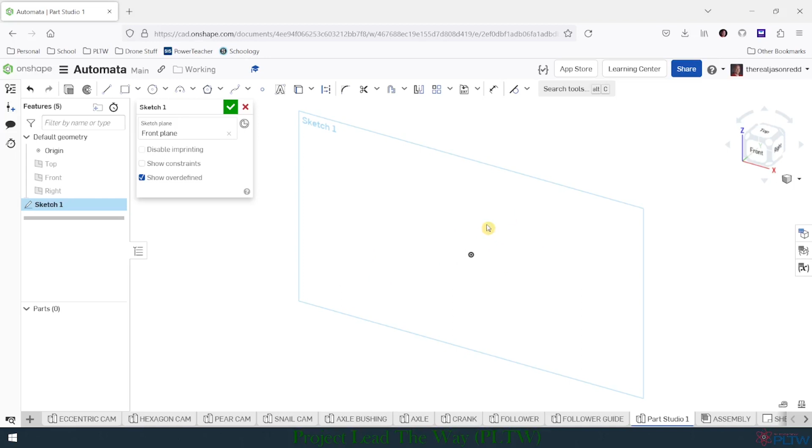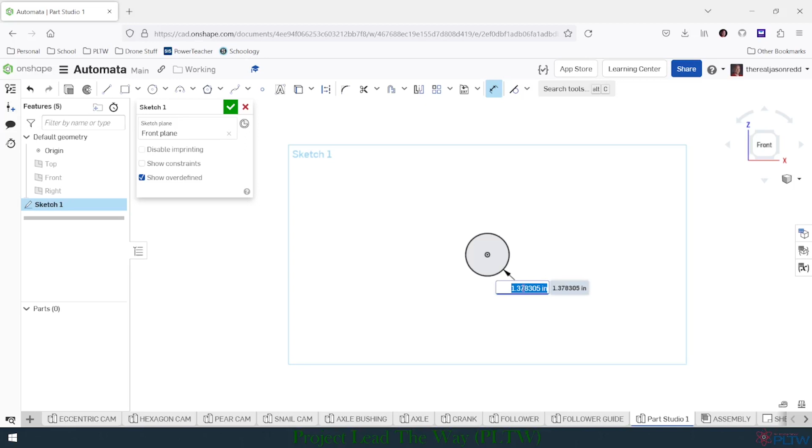Next, click on Front on the view cube and zoom out a little bit. Go to Circle, start this circle at the origin, and place it here. We'll use the dimension tool to dimension this circle so that it has a diameter, and since we're given the radius, we need to type in 0.3125 times 2.

Next, we'll leave the origin on. We'll go to Line and draw a line that goes through this circle, but just above the center point of this circle.

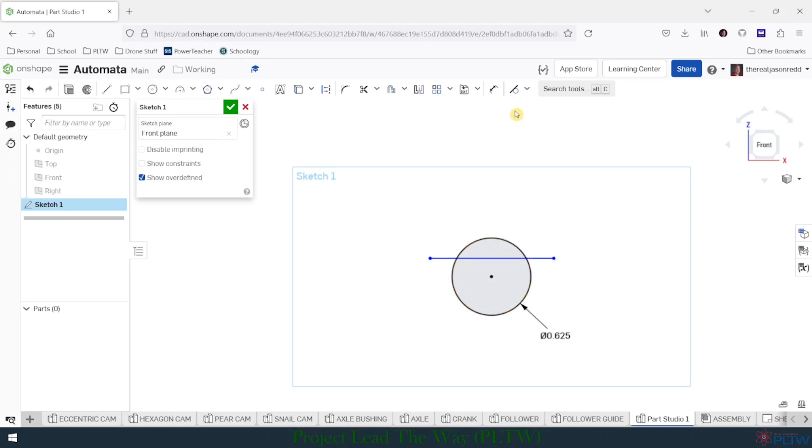Something like that. Then we'll go to Dimension, and dimension the distance from this line to the center point, making this distance 0.0625.

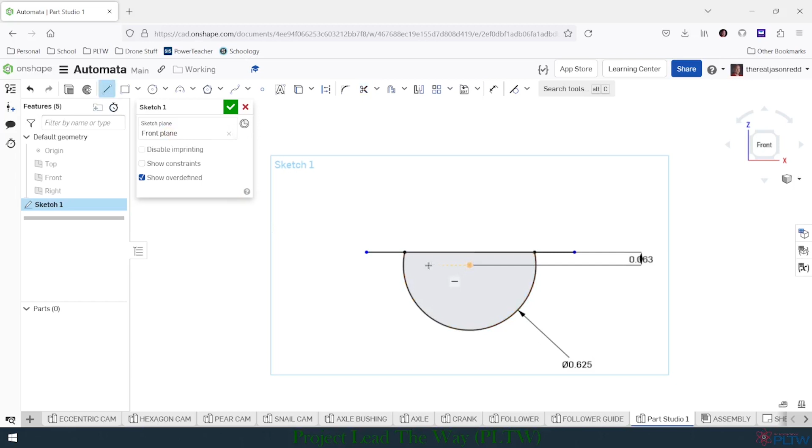Next, we're just going to trim up a little bit, trimming the top part of this circle here. We'll go to Line, and start a line at the point of the circle right here, and draw it straight up until it hits the line.

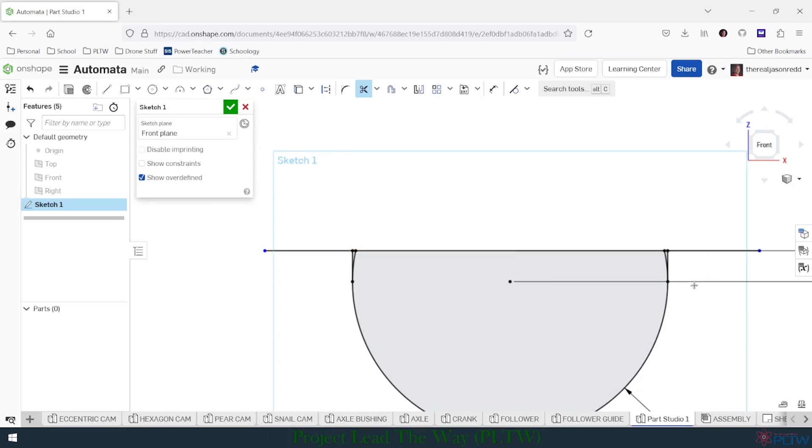We'll do the same thing on the opposite side, making sure it finds the center point of the circle, and go straight up. Then we'll trim off the excess parts of this sketch, making sure to trim off this inner part of the circle here, and then finish this sketch.

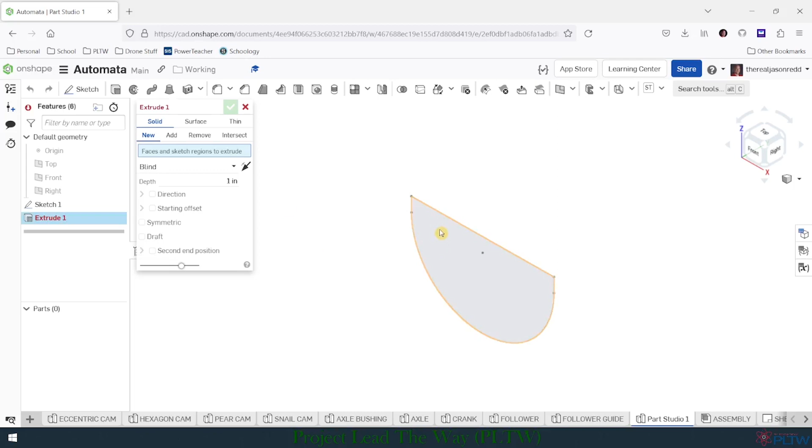I'm going to go to the isometric view so I can see the extrusion as it happens. I'll go to Extrude, choose my sketch, and type in a distance of 0.625. Now I'll hit the check mark.

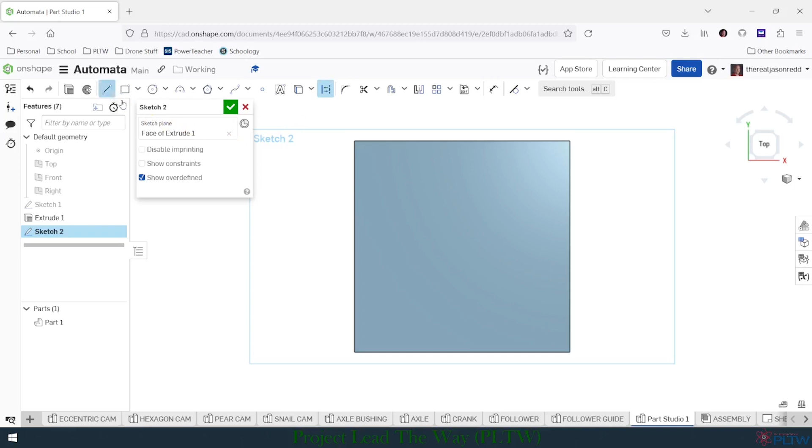Now I'm going to go to Sketch and place a sketch on the top surface of this roller, and go to Top on the view cube. Next, I'll turn on the construction option, go to Line, and draw a line from this corner to the opposite corner. The reason is so I can find the midpoint of this surface — I could have gone from this corner to that corner, but I just did this one.

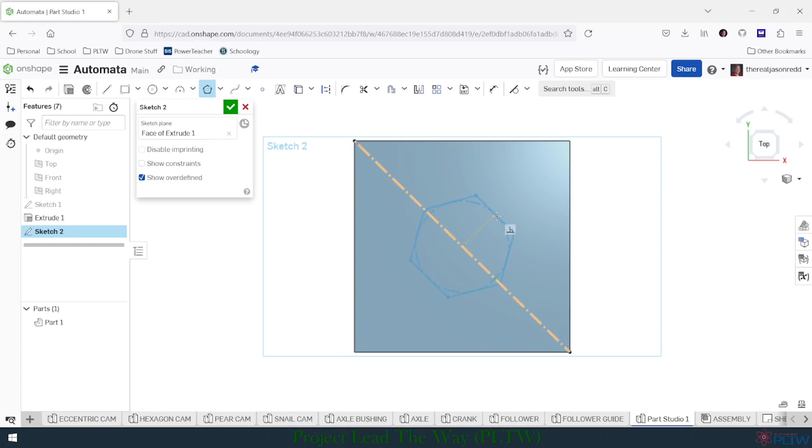Next, I'll go to Inscribed Polygon and start at the midpoint of this line, pulling it straight up so you see the dashed line going straight up. The number of sides of this polygon needs to be 4. I'll give the diameter of this circle a diameter of 0.25, press Enter, and finish this sketch.

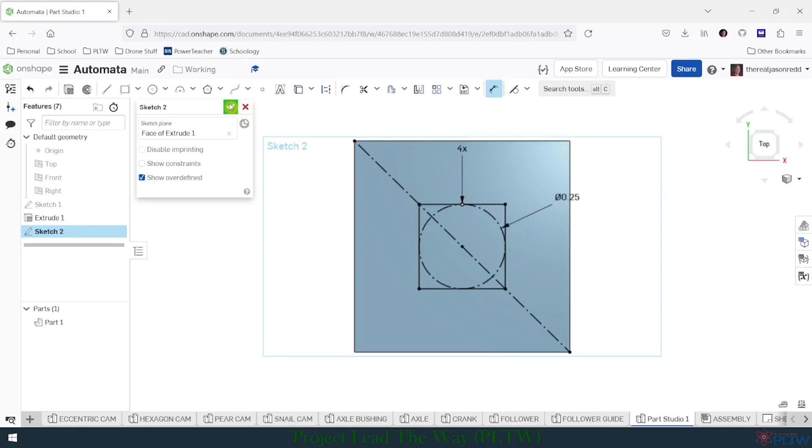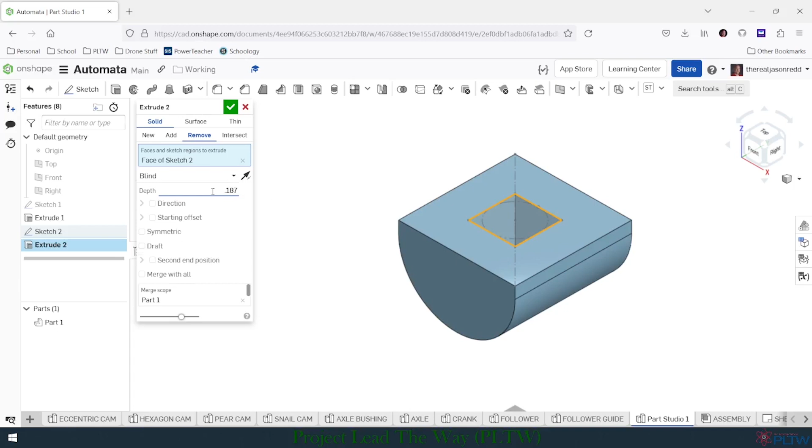I'm going to go to the isometric view so I can see the extrusion, and go to Extrude. I'll choose this square and choose Remove as the option so that it cuts out. The depth of this square hole needs to be 0.1875. I'll press Enter, and now hit the check mark.

Last, I need to rename this tab, so I'll right click down here and choose Rename, and type in Roller. I'll highlight this name and hit Control C, come over to Part 1, right click on it, choose Rename, and hit Control V to paste.

Next, I'll right click on this roller name and choose Assign Material. I'll choose the drop down option next to None, and scroll down until I find PLA, then hit the check mark.

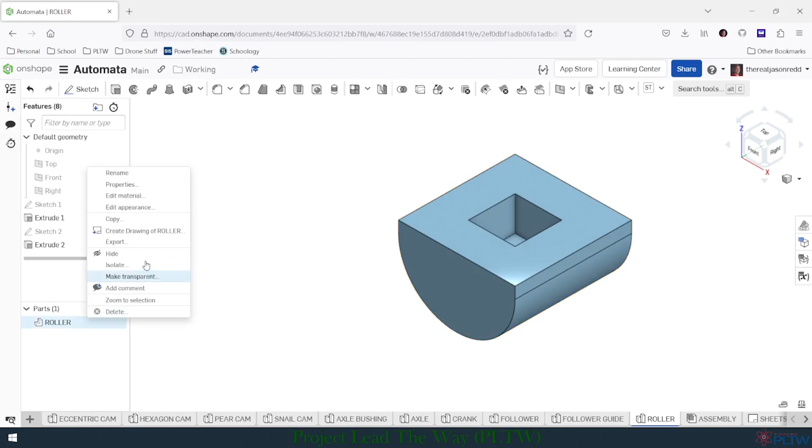Lastly, I'll right click and edit the appearance to give it a color — I'll go with this red color, and hit the check mark. And that's how you create the roller in Onshape.